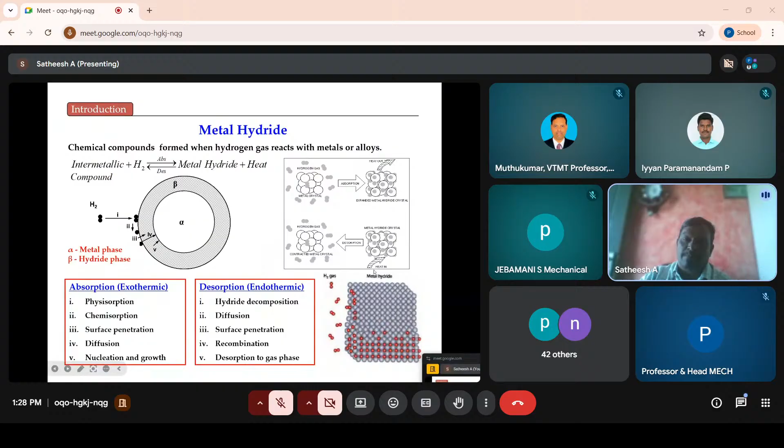So whenever we want hydrogen, you apply a little quantity of heat, and the hydrogen will be released from the metal hydride. So you can utilize that hydrogen. So because of this exothermic and endothermic reaction, with the selection of alloy, you can achieve a minimum of minus 25 or 30 degrees Celsius to a maximum of 200 degrees Celsius.

So this metal hydride gives a dual application. One is to store the hydrogen in the safest method, and at the same time heating and cooling. Because of the selection of that alloy, heating and cooling can also be achieved. So this is one of the best approaches and safest methods of hydrogen storage as compared to the other conventional methods. So the various approaches of how the hydrogen is absorbed: the physisorption initially contacts the metal lattices, and the chemisorption slowly penetrates into the void spaces in the metal hydride.

So of course, whatever material has been synthesized, we need to go for the characterization. That means whether the metal hydride is eligible for storing the hydrogen for our requirement. So this characterization study, basically pressure, concentration, temperature characteristics, shows whether the material can be used for hydrogen storage application. Initially, you can see here, metal hydride is filled inside the container and we slowly supply the hydrogen at the operating pressure and temperature, which leads to an increase in the

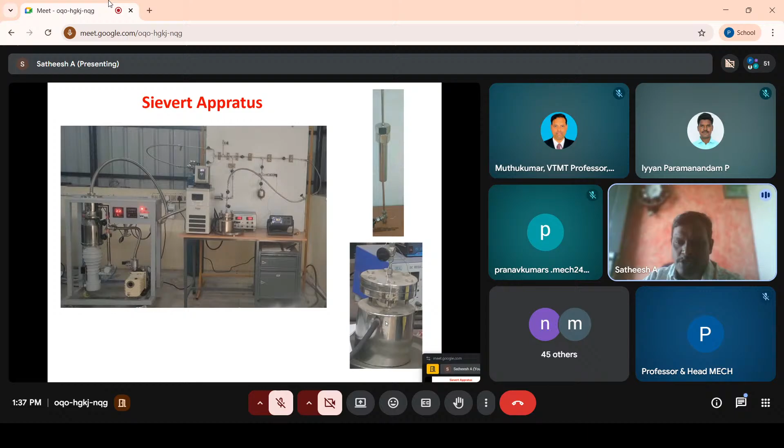So this is one of the sample reactors where we can do the characterization study, and this is for studying hydrogen compression and various hydrogen storage applications. The capacity of this reactor is 500 grams of hydrogen. Half a kg of hydrogen is filled inside this reactor. In order to remove and supply the heat, this thermostatic bath was used to transfer the heat.

So with this hydrogen absorption and desorption, we can construct various thermal devices: hydrogen purification, heat pump and refrigeration applications, hydrogen compression, thermal energy storage, and so on. Hydrogen purification is one of the prime and important ones. Whatever hydrogen is produced from various methods, we cannot expect that all of it is of high quality. Maybe grade 1 or grade 2, which is 98 or 99% hydrogen. Along with that hydrogen, some carbon dioxide or carbon monoxide may be present. Through this metal hydride absorption and desorption approach, we can achieve a purified form of hydrogen, which is grade 3, 99.999%.

So what does this purification basically do? The impure hydrogen is supplied to the metal hydride. Once it is absorbed, after complete absorption, you release the hydrogen by supplying waste heat or solar heat or whatever heat is available. The moment the hydrogen starts desorbing, it allows only the hydrogen out; the remaining impure gases are retained within the metal hydride itself. After a few cycles, these impure gases are purged from the metal hydride. So simply by absorbing and desorbing, we can achieve a purified form of hydrogen in this metal hydride approach. This purified hydrogen gas is a crucial requirement for fuel cell based transportation applications, ammonia production, refining processes, and various other industrial needs.

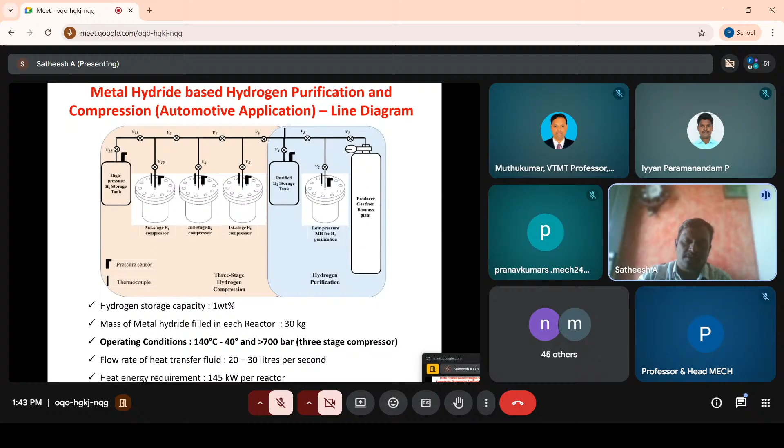The operating temperature and other conditions remain the same, but to increase the pressure for transportation application. If we increase the pressure, what happens? Definitely the amount of hydrogen stored inside the container will be increased. So for that purpose, pressure up to 700 bar was preferred by integrating three different reactors, which is three-stage hydrogen compression.

So this is another application, for refrigeration. For refrigeration and heat pump applications, hydrogen is initially assumed to be filled in reactor A. When you supply the heat, hydrogen transfer will take place from reactor A to B, and hydrogen will be absorbed. This process is carried out at high pressure. Once hydrogen is completely absorbed by reactor B, you supply the heat transfer fluid from high temperature to medium temperature, and similarly medium temperature to low temperature. So from high pressure to low pressure, low temperature will be attained.

Once it is attained, you release the hydrogen from reactor B. When the hydrogen is released, this reactor is already at low temperature, probably atmospheric temperature, 20 or 25 degrees Celsius. The moment hydrogen desorbs, this reactor immediately goes to less than 0 degrees Celsius. That low temperature can be carried by the heat transfer fluid. So by circulating the heat transfer fluid, we can achieve space cooling or refrigeration applications.

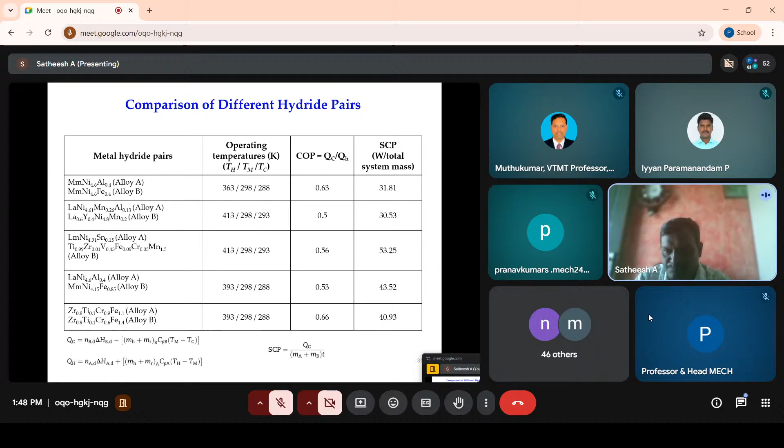So like that, a different combination of alloys were chosen and the operating temperatures. From these, the performance of the refrigeration was calculated. From this, probably the zirconium based alloy is giving high coefficient of performance, and at the same time specific cooling power, that means how much wattage of cooling is done for the total mass of the alloy used. So at the same time, we have to see the specific cooling power.

Though COP is high, specific cooling power is relatively low, but in such a case, the other combination of alloy is giving. So we have to choose, depending on the cost factor and the cooling effect, which alloy pair is suitable for our requirement. Similarly, whatever the temperature we want, maybe still lower than atmospheric, minus, we can go for double stage or different combinations of metal hydrides. We can go for constructing the heat pump or refrigeration. So this is the hydrogen compression approach.

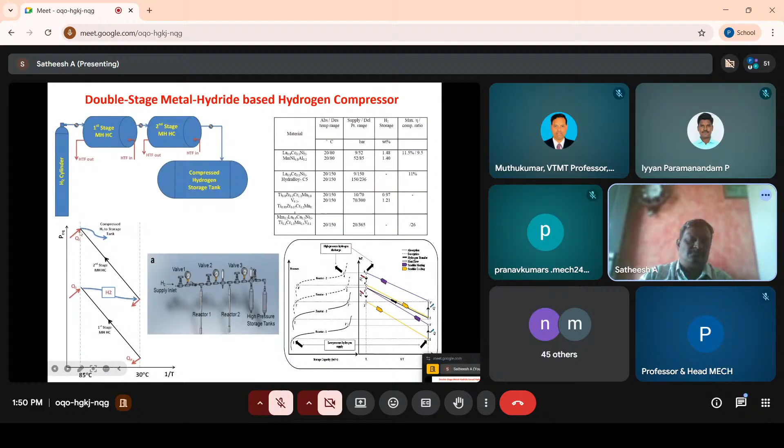So the idea of how the compression is carried out, maybe from a single stage to two stage. So first absorption will be carried out, close all the valves, compress it by supplying the heat transfer fluid. Then from first stage to second stage, still the pressure will be increased. You can see here, like that. If we go for two stage and three stage multi-stage compression, we are able to achieve the required pressure.

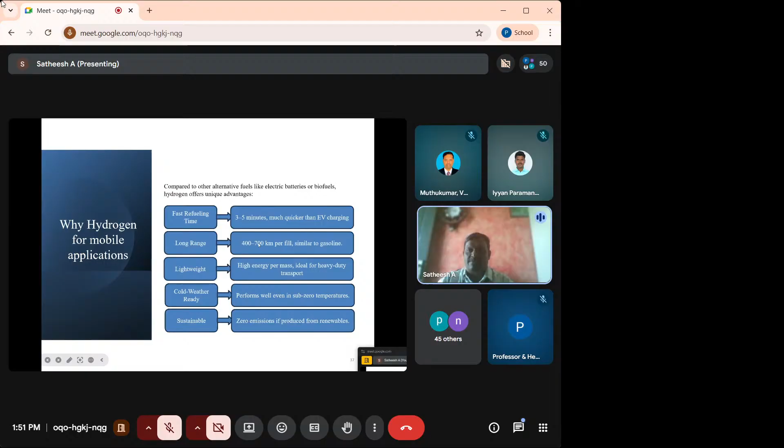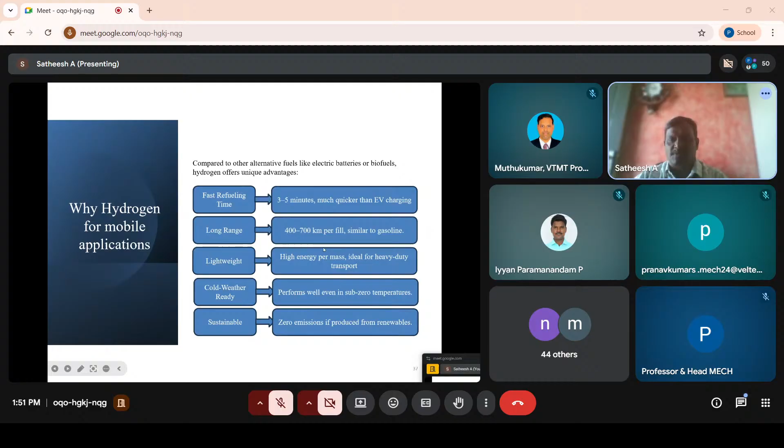On board applications, this is another case study that we have carried out for stationary and mobile applications. So based on this analysis, why we are focusing on hydrogen: faster refueling, long range, lightweight, and even for cold countries, at sub-zero temperatures less than 0 degrees Celsius, this hydrogen based vehicle will start, and zero emission. So once you compress the hydrogen, the complete setup has to be kept inside the vehicle. So higher the pressure, higher the quantity of hydrogen filled in the reactor.

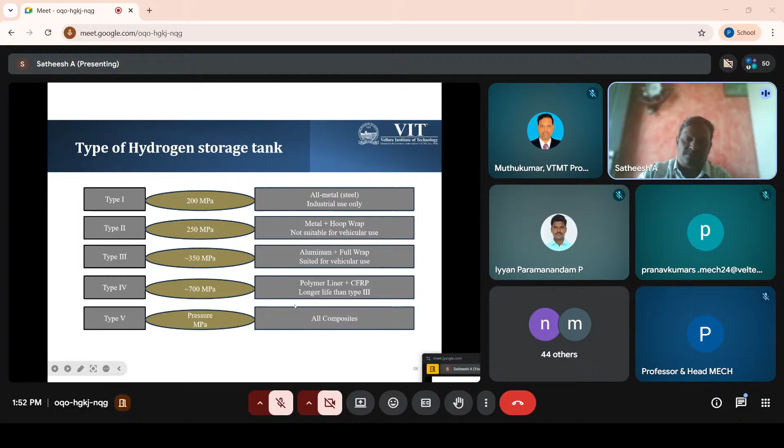So there are different types of hydrogen storage tanks, named type 1, up to 200 megapascal that the vessel will withstand. The fabrication material is steel, only pure steel, so indirectly the weight of the vessel will be increased. Type 2 cylinder, 250 megapascal, some reinforced materials with all stainless steel is used. Type 3, type 4, type 5, like that, different categories of storage vessels are used, and the pressure will be increased. So we have conducted some numerical analysis. After compressing the hydrogen, it will be stored in a separate container. For that separate container we have focused on the type 4 cylinder.

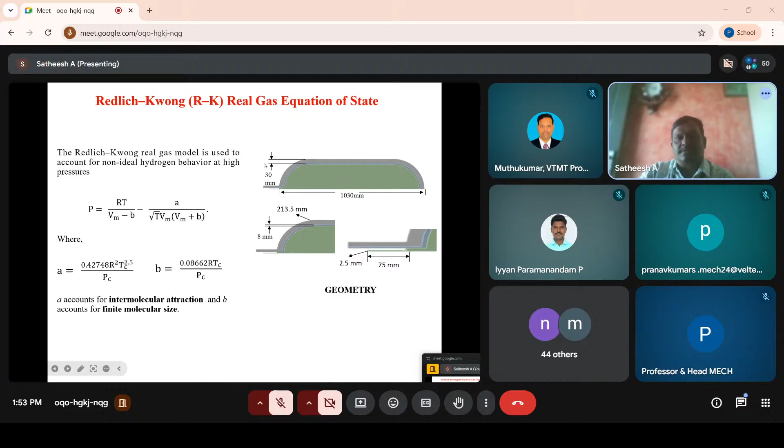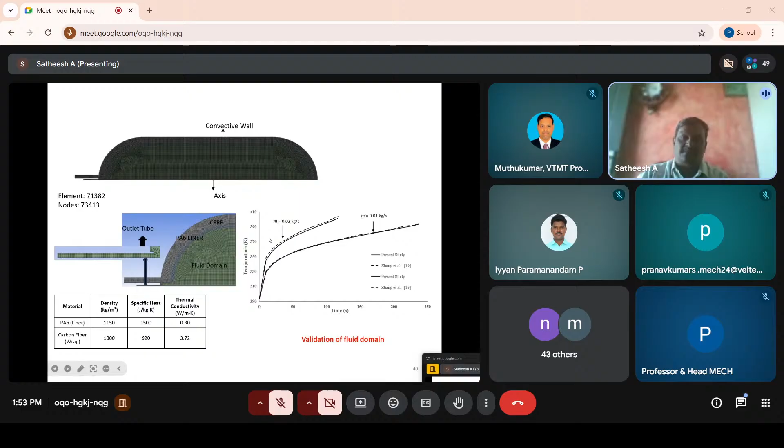Using ANSYS Workbench, we have done a mathematical modeling to see the hydrogen storage at the elevated pressure of 700 bar at a different mass flow rate. You can see here how much time has taken and what is the rise in temperature inside the vessel. Say for example 0.01 kg per second. The rise in temperature with respect to time is almost 250 seconds from atmospheric temperature to 370 Kelvin. So this temperature rise indirectly reduces the efficiency of the filled container.

So the allowed temperature is 360 Kelvin. If it goes beyond that, the material will lose its inherent characteristics. So the rate of hydrogen filling is very crucial in the type 3 or type 4 cylinder. So we have done at different configurations the inlet position at different mass flow rates.